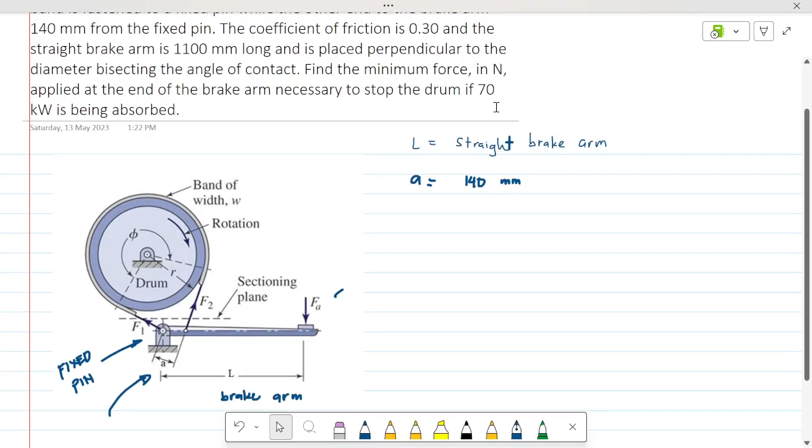Ano yung tinatanong niya? Find the minimum force N applied at the end of the brake arm necessary to stop the drum if 70 kilowatts is being absorbed. Okay. Hanapin muna natin from the 70 kilowatts yung torque. So, power dito is Tn over factor. Pwede rin, this is equal to yung F net times velocity. May velocity ka ba dito? Actually, nagbigay siya ng RPM dyan, pwede mo makuha yung velocity.

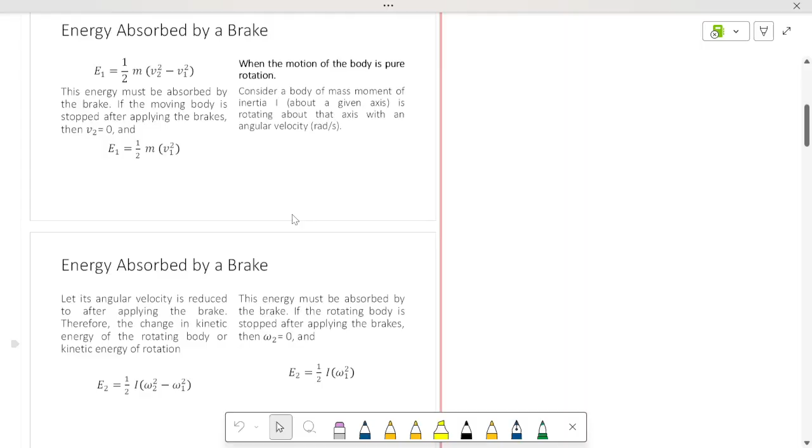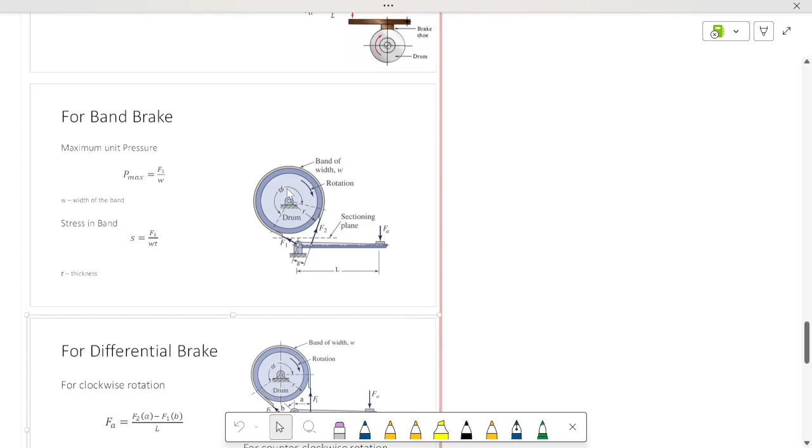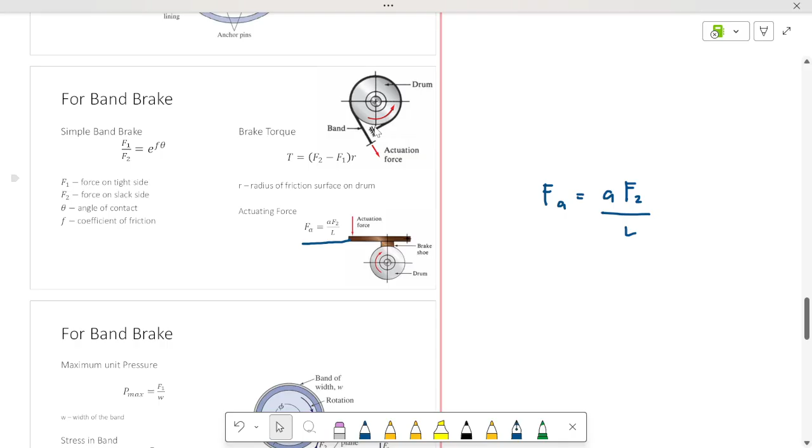Ayan. This one. The actuating force is F A equal to A, yung F2 over the length. Yung F2 is the slack side. And otherwise, kapag there are problems you cannot solve, yung actuation force, pwede mong gamitin yung tight side. Depende dun sa problem. Pero ang tama talaga dyan is the force on the slack side. The force on the tight side is always greater than that of the force on the slack side.

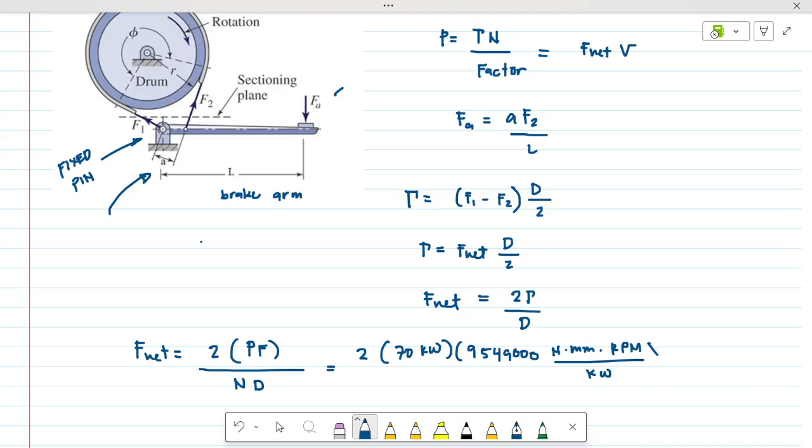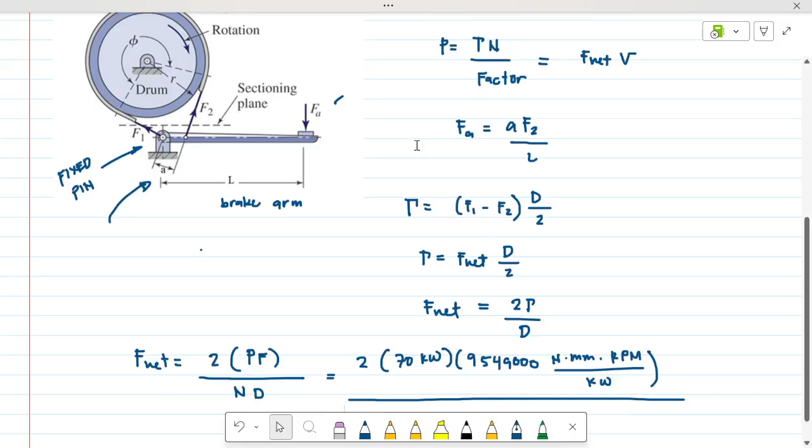May binigay bang torque dyan? Actually, wala, pero meron tayong power. So, punta natin yung power dito. Our power is power factor times Tn. So, power times factor divide by N. D. Yan yung F net natin. So, twice nung power, what is power? 70 kilowatts. Times yung 9,549,000 Newton-millimeter RPM per kilowatt. Check natin if we have recorded this. Okay, we have recorded this. Divided by N. Yung given N natin is 260 RPM.

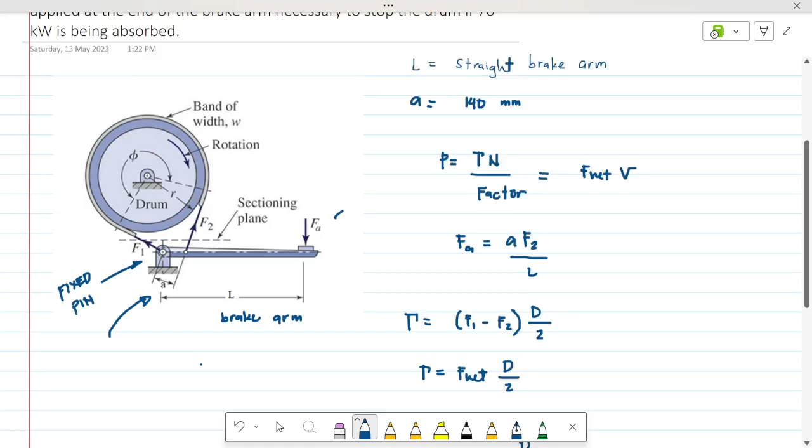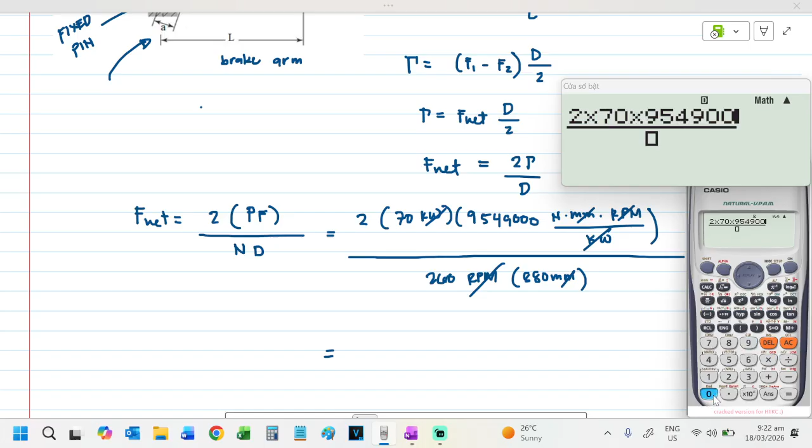The diameter of the drum, if I'm not mistaken, is 880 mm. So, cancelling all same units, RPM, kilowatt, millimeter, ang lalabas ay Newton. So, on our calculator, pakipindot natin para makita natin. So, that is 2 times 70 times 9,549,000 divided by 260 times 880. So, our torque here is 5842.

Okay, 5842.9196. This is in newtons. Torque pa lang yan. So, yung torque na yan, pwede nating makuha dyan yung F net. Ay, F net na pala. F net na to. So, our F net is equal to F1 minus F2. Ayun yung value niyan. Pero sa F1 and F2, pwede na natin gamitin yung ratio nila. Ratio of the forces, that is e raised to mu theta. Okay? So, dito pwede natin ma-equate sila. F1 is equal to F2 e raised to mu theta.

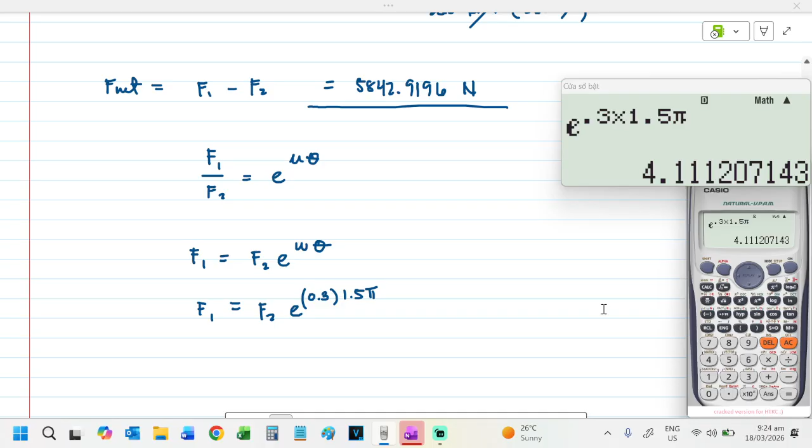So, yung F2 natin, saan ba natin pwede makuha yan? So, F1 na lang muna. F1 tapos F2. Yung e raised to, coefficient of friction is 0.3 tapos 1.5 pi rad. So, that is 0.3 times 1.5 pi. Hindi mo na kailangan i-convert ito sa degrees. So, tab natin. Hanapin ko yung e. Shift e. Oh, sorry. Raised to 0.3 times 1.5 pi. So, the answer is 4.1112. So, 4.1112 F2. Pwede natin i-equate yan para magkaroon ka ng another equation.

So, from F1 minus F2 is equal to 5842.9196. Yung F1 natin is equal to this. So, pwede nating ipalit yung F1. That is 4.1112 minus 1, factor out mo yung F2. This is equal to 5842.9196. So, dividing both sides by 4.1112 minus 1, the answer will be F2. So, tab natin siya. 5842.9196 divided by 3.1112. Ba't naging ganun? Minus 1 na agad eh. So, that is 1878.0276.

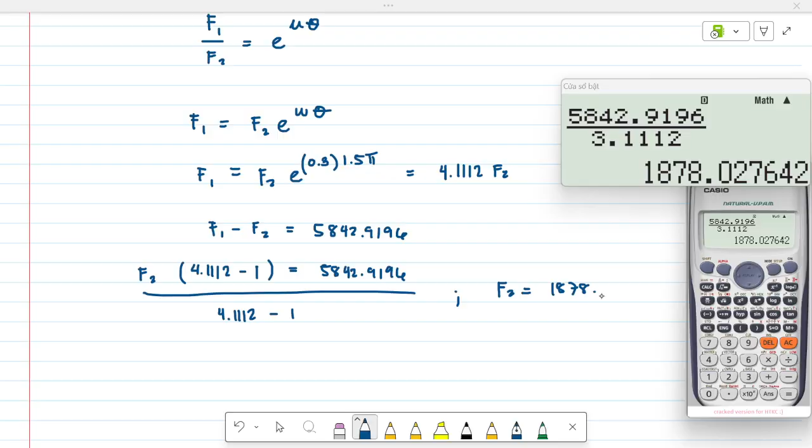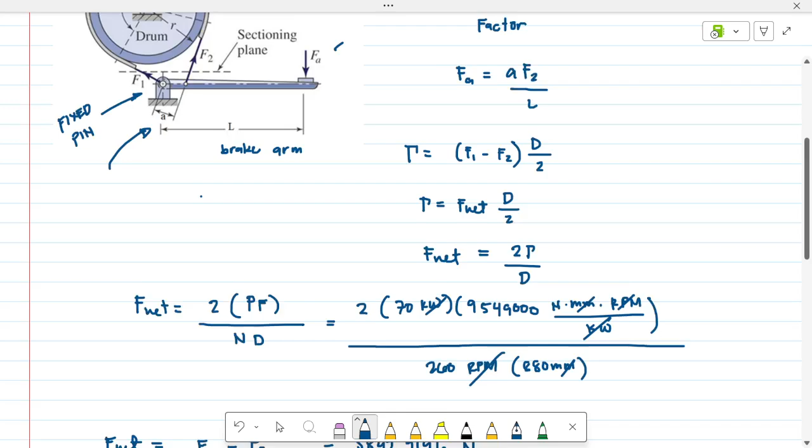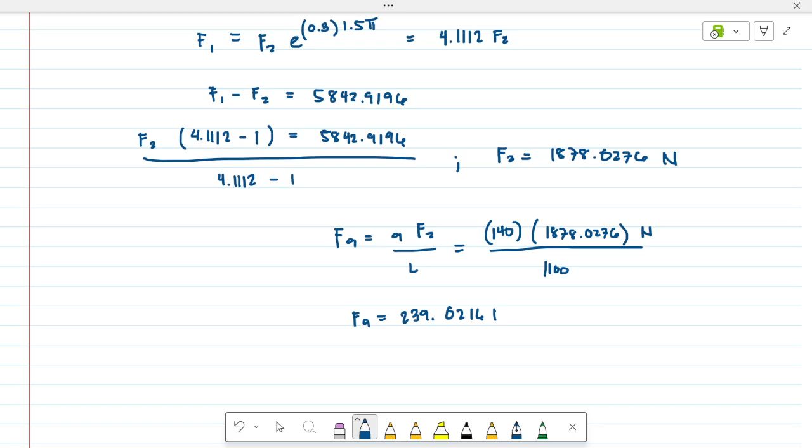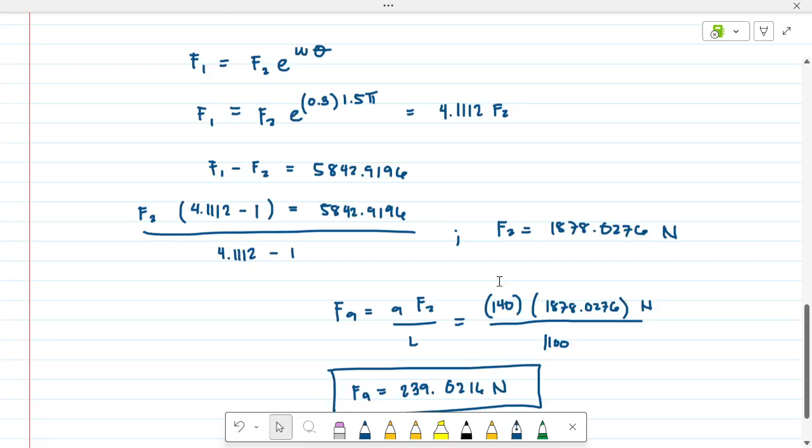That is newtons. Now, ang hinahanap dito is the actuating force. So, actuating force FA is equal to a F2 over L. Yung a natin dito, ang binigay niya is 140 tapos 1,100 yung length. So, 140, tanggalin mo na units kasi ma-cancel naman. 1878.0276 newtons, divide by 1,100 times 140. So, our answer is FA equal to 239.6216 newtons. Pero dun sa book, I think ang sagot dito ay 273.1. I don't know what happened there, pero ginawa naman natin yung tama. So, there is nothing wrong here.

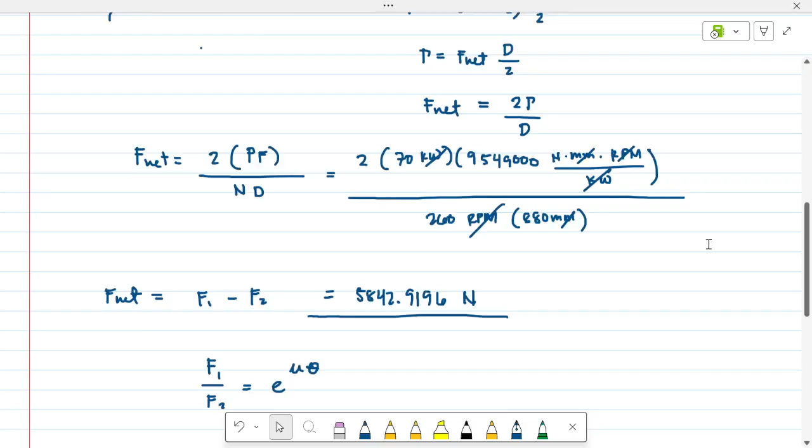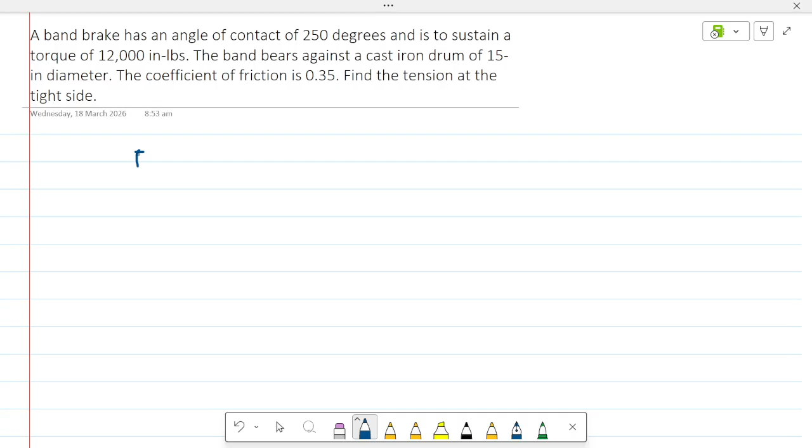Okay? So, next problem. Teka, parang may nagbigay dito ng RPM. Solve natin siya other way around later. So, a band brake has an angle of contact of 250 degrees and is to sustain a torque of 12,000 inch-pounds. The band bears against a cast iron drum of 15-inch diameter. The coefficient of friction is 0.35. Now, find the tension at the tight side. Saan ba makikita yung tension? Dito lang yan, sa F1 over F2 equal to e raised to f theta. Meron ba tayong F1? There is none. F2, there is none. But we are given the torque.

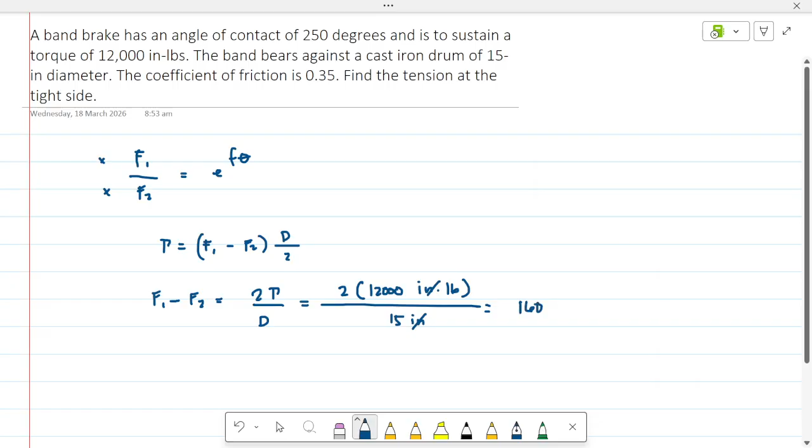So, for the torque, di ba ang torque natin is F1 minus F2 multiplied by diameter over 2. So, yung F1 minus F2 natin is equal to twice the torque divided by diameter. Twice ng 12,000 inch-pound divided by the diameter, 15 inch. Cancel all the same units, pound ang lalabas dyan. So, at your calculator, 24,000 divided by 15. The answer is 1,600 pounds. Now, that is just the F-net. F1 minus F2 is equal to 1,600.

Dito pwede natin kunin yung F1: F2 times e, tapos yung theta natin is 250 degrees, coefficient of friction is 0.35. So this is 0.35 multiplied to 250 pi over 180. So F1 is equal to F2 times, calculator natin, shift e, 0.35, 250 pi divided by 180. So, 4 decimal places, 4.6051. Yun yung value dito. Palitan natin on this equation. This is A, this is B. Ipasok natin yung B sa A.

So, this is 4.6051 F2 minus F2 equal to 1,600. Now, dividing both sides by 4.6051 minus 1. Ang hinahanap pala ay F1, the tight side. So, this is 1,600 divided by 3.6051. Mapapansin nyo, lagi kong mini-mental math, mina-minus ko agad yung 1. Kasi ganun naman yung process, lagi minus 1. Para lesser yung gagawin mo sa calculator.

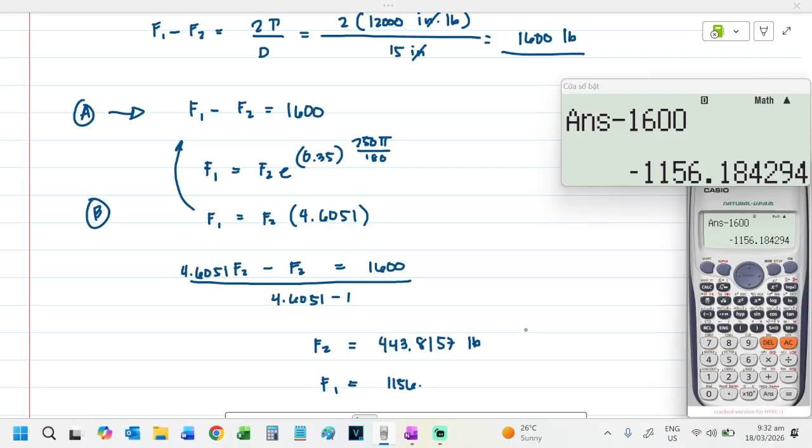Okay, so that is 1156.1843. I don't know ba't ang lalayo na nagiging sagot niya sa book. O, tignan natin, reference natin yung book later.

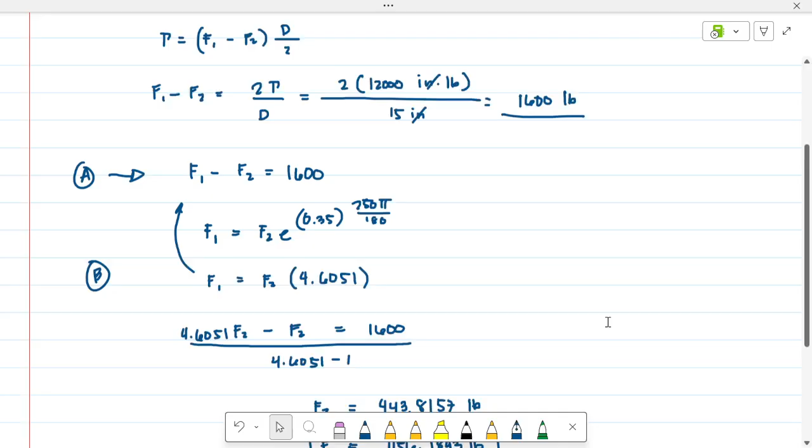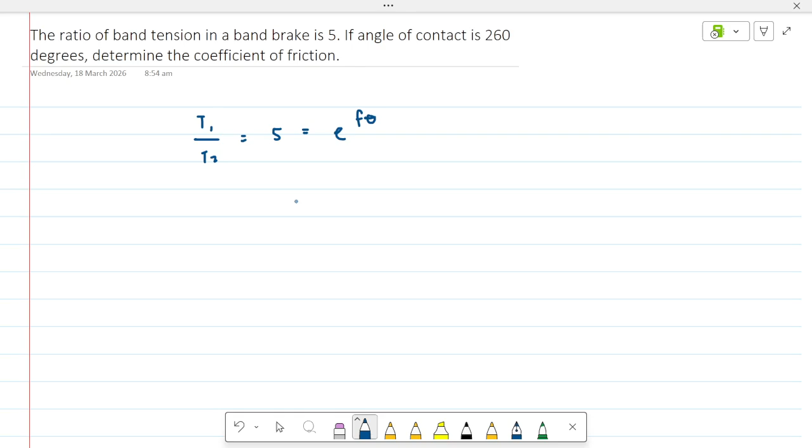And next problem, the ratio of band tension in a band brake is 5. So, T1 over T2 is equal to 5. And this is equal to e^(f theta). Now, if angle of contact is 260 degrees, determine the coefficient of friction. Okay tayo dyan. Sir, shift solve. Sa board exam. Pero dito, hindi pwede.

So, this is 5 equal to e. Yung coefficient of friction is as is. Tapos, 260 pi over 180. Yan. So, ibaba natin to. Simplify ko muna yung 260 pi over 180. Or pwede na rin, ganito gawin nyo. I-ln natin lahat to. ln, natural logarithm of 5 equal to, ibaba ko ito. Bababa siya. So, 260 pi over 180, f. Okay? ln ng e. Binaba ko lahat.

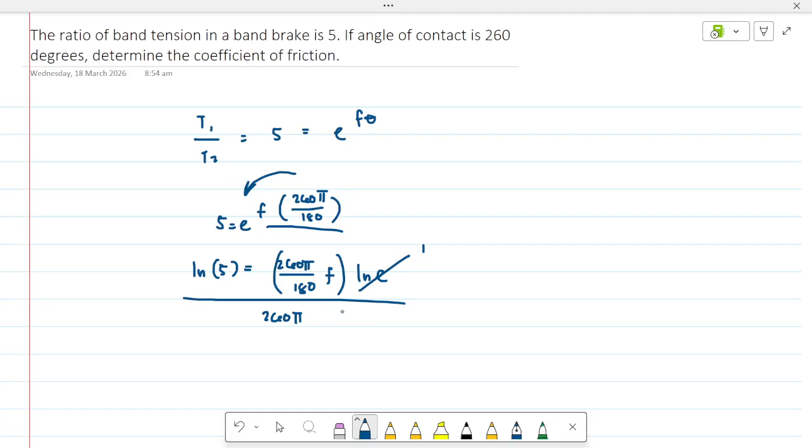Itong expression na to, pwede mo ibaba yan. Bring down pag nag-natural logarithm ka. Any power of your natural logarithm could be a multiplying variable pag ibinaba mo siya. So what will happen there, divide ko na lang both sides by 260 pi, kasi cancel na itong ln of e. That is equal to 1. Try nyo sa calculator nyo, ln of e. So, 260 pi over 180. So, cancel ito.

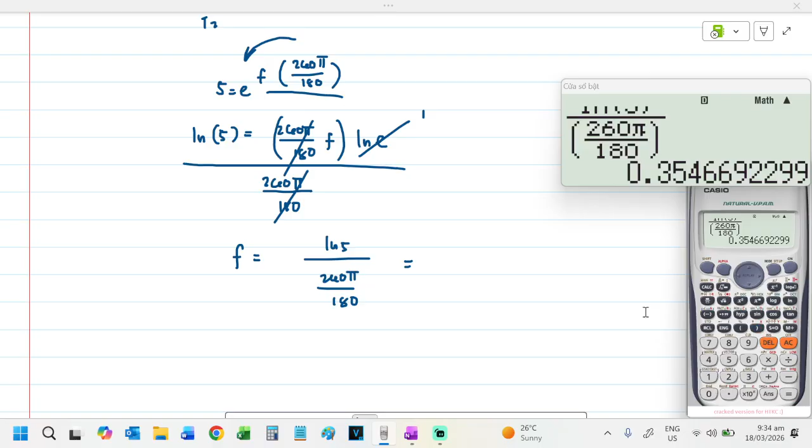So, f will be equal to ln of 5 over 260 pi over 180. So, the value of your coefficient of friction is, hindi siya naman mahirap, basic lang. ln 5 over 260 shift pi over 180. So the value for your coefficient of friction is 0.3547. Okay, basic lang yung next problem.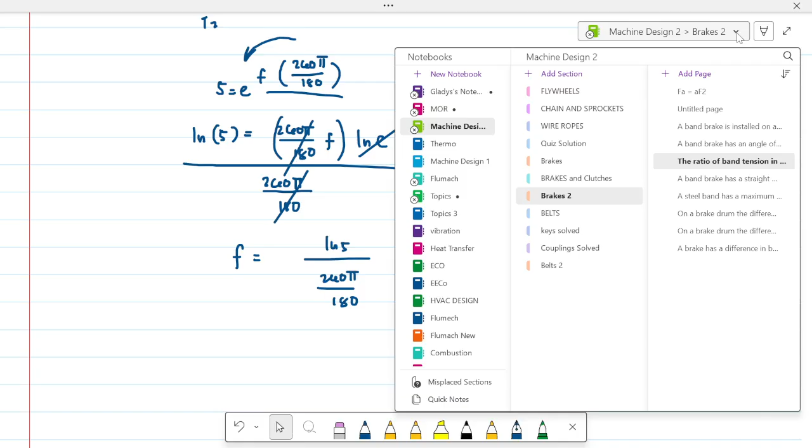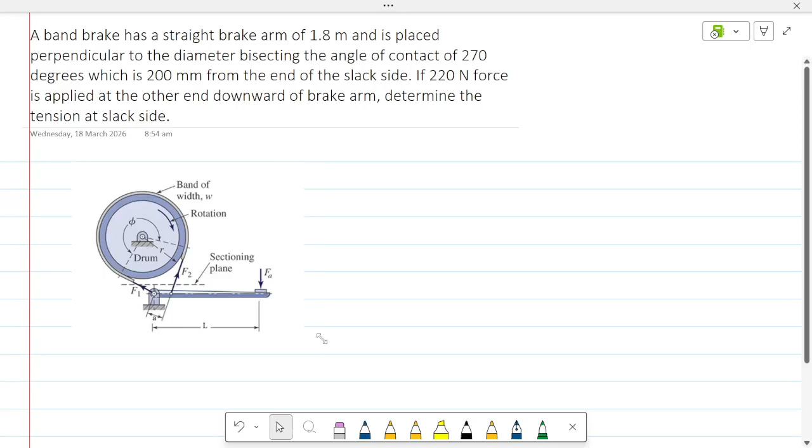Next is, a band brake has a straight brake arm. So diretso na naman siya. Okay? Of 1.8 meters. So, paste ulit natin siya. Straight brake arm siya, and is placed perpendicular to the diameter, bisecting the angle of contact. Sabi dyan, the straight brake arm. Right? So, perpendicular to the diameter, bisecting the angle of contact.

So, ano yung bisects? Ibig sabihin, itong dalawang to ay magkalinya sila. Ito, imumove natin ng konti, magkalinya daw sila. The angle bisector. Yung angle mo nandito. Binisect niya yung dalawa. So, equal part ito. Okay? Ganun yung pag-drawing sa kanya.

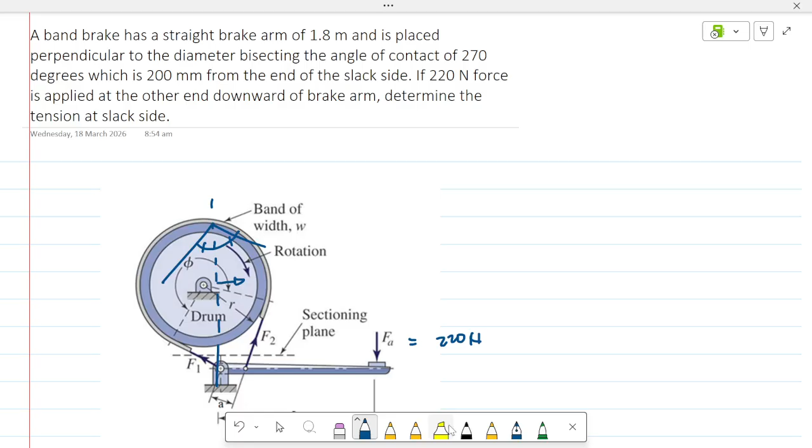Now, angle of contact is 270 degrees, which is 200 mm from the end of the slack side. Now, if 220 newton force is applied to the other end, downward of the brake arm, so the applied force is 220 newtons. Determine the tension on the slack side. So, diretso tayo ng FA is equal to A F2 over L. Sir, magmo-moment pa ba ako? Hindi na kailangan. Kasi binigay ko na yung formula sa inyo.

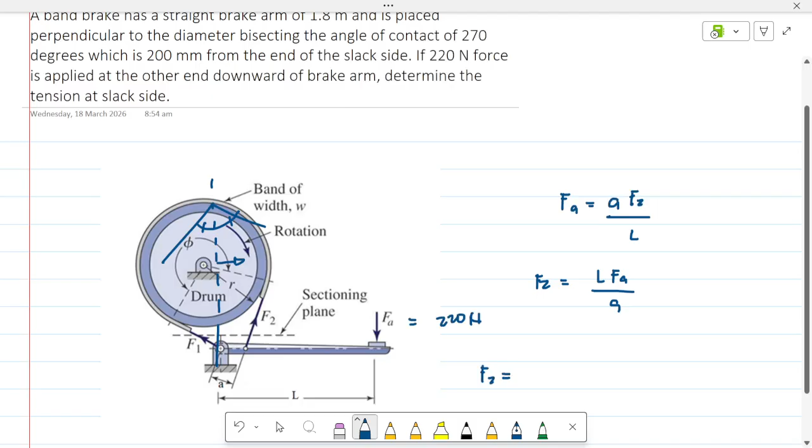Okay? So, gagawin mo na lang dito, F2 is equal to L FA over A. So, F2 is equal to, ano yung L natin? Binigay dyan na 1.8 meters. Gawin natin 1,800 mm. Tapos yung FA natin is 220 newtons. Yung layo niya is A. Ano yung A dyan? Nagbigay ba? Ito, 200 mm. Ano ba sagot dito? 200 mm. So, let us try what will happen here.

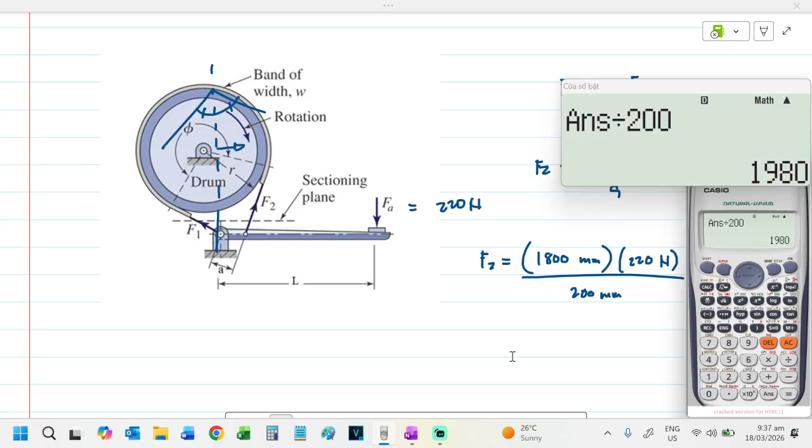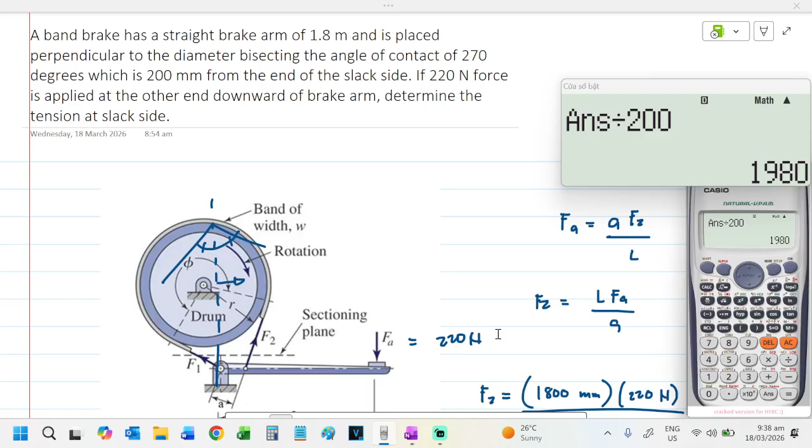So, this is 1,800 times 220 divided by 200. So, the answer is 1,980. Sir, ba't naging ganun? 1,980 siya. That is 2 kilonewtons, yung sagot dyan. 1,980. So, 1.98 kilonewtons F2. Hindi na kailangan mag-moment. Yung iba nagmo-moment pa. Hirapan lang kayo dyan pag nag-moment.

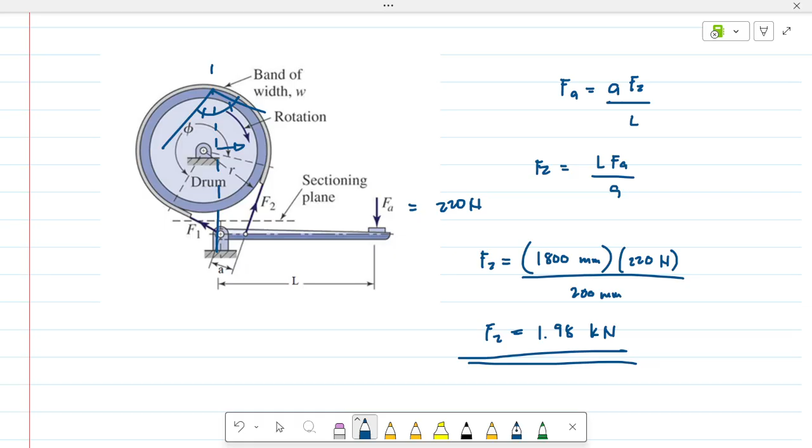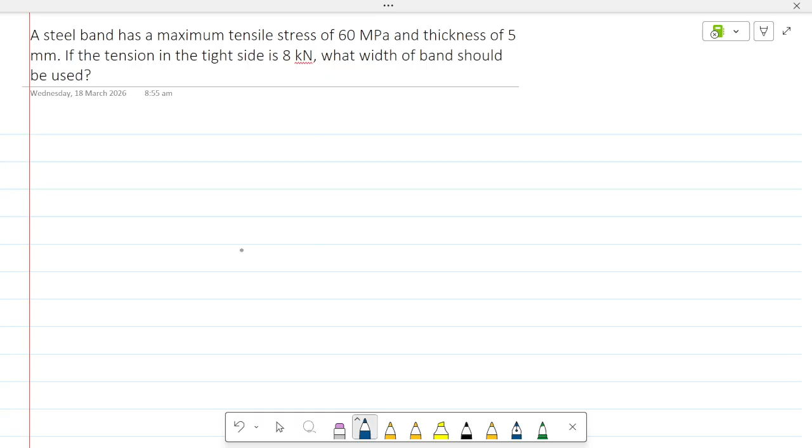So, this is for that problem. Next one. A steel band has a maximum tensile stress of 60 MPa and thickness of 5 mm. If the tension on the tight side is 8 kilonewtons, find the width of the band that should be used. So, paano yung solving natin dito? Yung stress on the band, okay?

The stress on the band is equal to force over area. Drawing natin yung band mo. Ito yung band. Belt yan eh. So, nandito yung force. Ano yung area? Ito. This is the thickness. This is the width. So, the stress now is equal to force over area. So, ibig sabihin yan, yung pulling force or tension, divide by yung area.

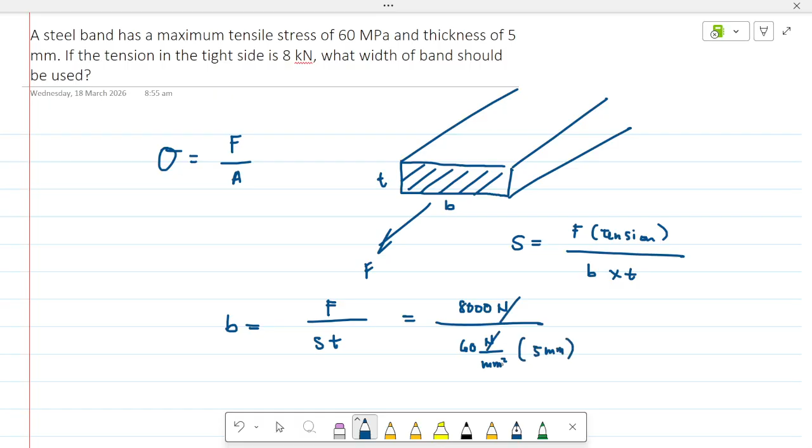So, meron ka bang force na binigay dyan? Tight side, yes. What width should the band be used? O, direction na agad ng solving. So, B is equal to F over ST. So, this is 8,000 newtons kasi kilonewton. Tapos 60 newton per millimeter squared multiplied to 5 mm. Cancel all same units. Mm squared may matitirang isa. So, aakyat yan sa taas.

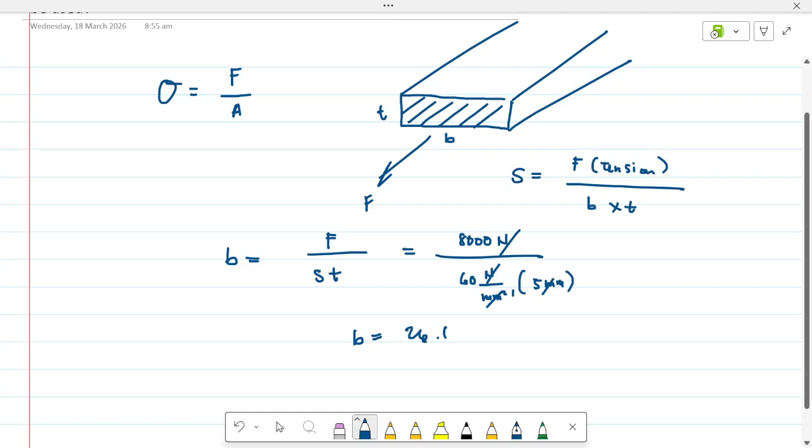So, calculating the value, 8,000 over 60 times 5. So, that is 26.67 mm. 26.67 mm. Board exam question yun. Ganun lang kadali.

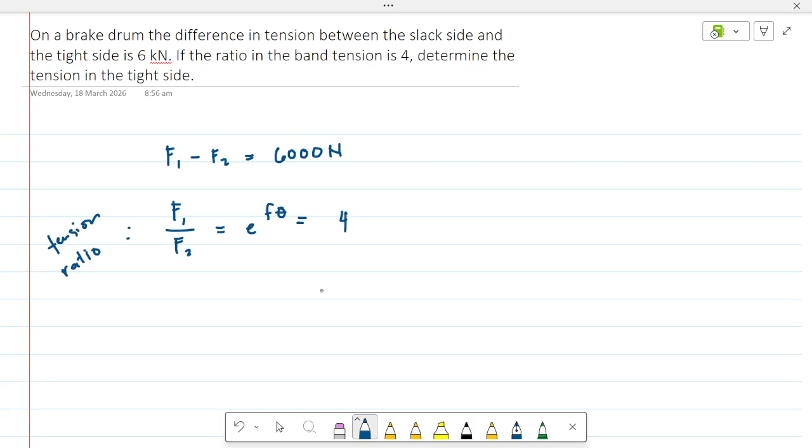So, next problem. On the brake drum, the difference in tension between slack side and tight side is 6 kilonewtons. So, F1 minus F2 is equal to 6,000 newtons. Now, the band tension ratio, e to the f theta, is equal to 4. Now, determine the tension on the tight side. Basic. So, meron ka equation nito.

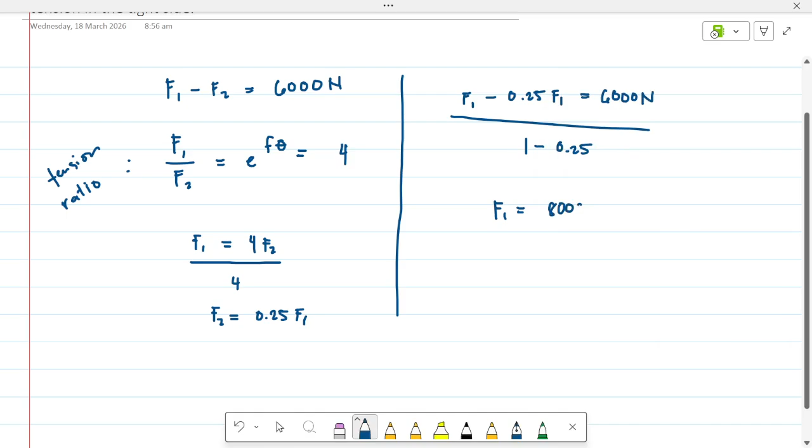So, F1 equal to F2 times 4. So, 4 F2. Determine the tension on the tight side. In terms of F1 tayo. So, pwede mo i-divide ng 4. Therefore, yung F2 mo ay 0.25 ni F1. Solving, F1 minus 0.25 F1 equal to 6,000 newtons. So, 1 minus 0.25, F1 is 6,000 divided by 0.75. That is 8,000 newtons. Okay, that is F1. Basic.

Next problem. Last two. On brake drum, the difference in tension. Ay, inulit na lang. Last one na lang pala tayo. Naulit na siya.

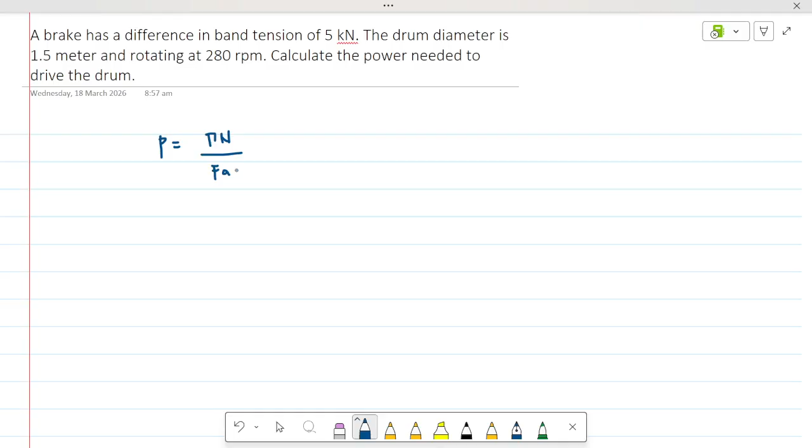A brake has a difference in band tension of 5 kilonewtons. The drum diameter is 1.5 meters and rotating at 280 RPM. Calculate the power needed to drive the drum. Pwede namang daanin mo dito: power is equal to Tn over factor. Pwede rin daanin mo sa Fnet times velocity. Velocity is equal to what? Ang velocity is equal to pi diameter times n. Itong dalawa, circumference.

Hindi na maalala kung paano sinusolve yun. Diba?

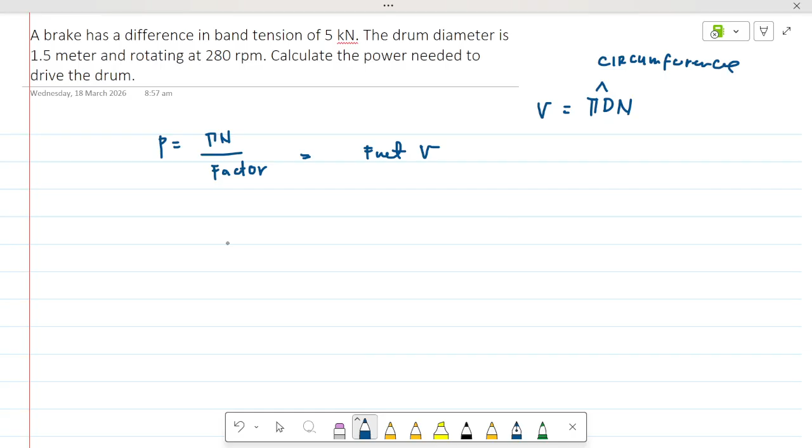Anyway. So, meron na tayong Fnet. So, power is equal to Fnet, 5,000 newtons, times pi, diameter 1.5 meters, so 1,500 millimeters. Tapos yung N natin ay 280 RPM. Kaya anong gagawin natin? Newton millimeter, dapat Newton meter. Newton meter is torque. Divided by seconds, joule per second, kilowatt yun. So, this is 9,549. Pero hindi dapat.

Tingnan natin yung unit, Newton millimeter. I-divide ko na lang ng 1,000 millimeters every meter. Tapos yung RPM natin, rev per minute. Times 1 minute every 60 seconds. Cancel. Ang natitira, Newton meter every second. Ang kailangan ko ay kilowatt. So, times 1 kilowatt per 1,000 Newton meter per second. Makancel si Newton, meter, seconds. Ang lalabas ay kilowatt.

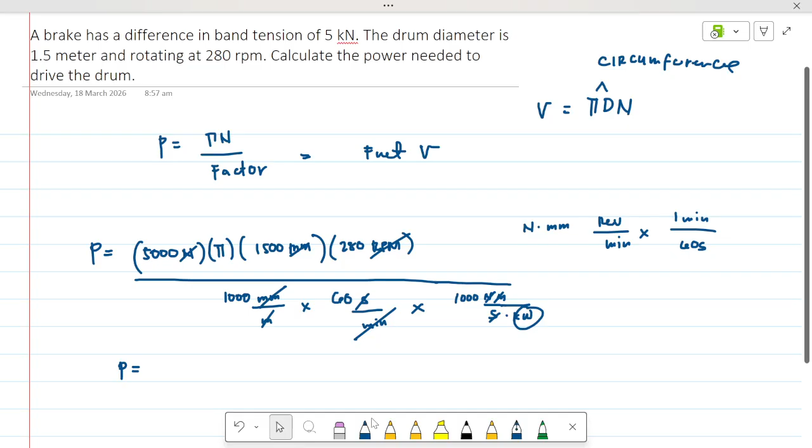So, mali pala na i-divide ko siya direkta ng 9,549. Kasi na-derive yun sa 2 pi Tn, hindi sa velocity. Huwag gagawin yun, ito yung tama. Calculator: 5,000 pi times 1,500. Common mistake dito, dinivide ng 9,549. Hindi naman natin dinaan sa Tn over factor, dinaan natin sa Fnet times velocity. Times 280, tapos 1,000 times 60.

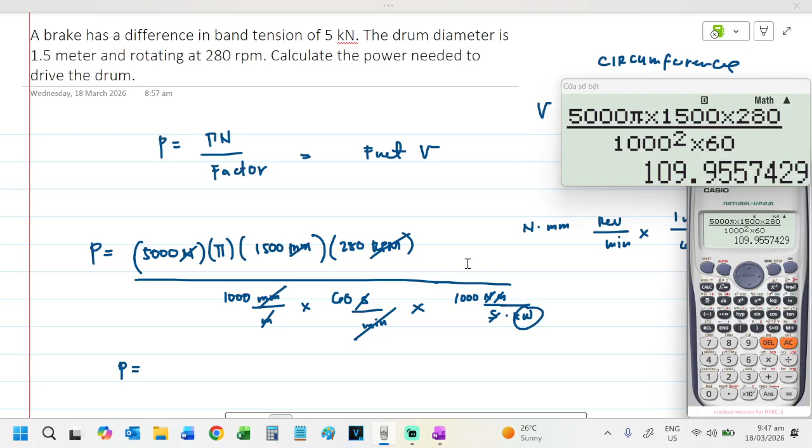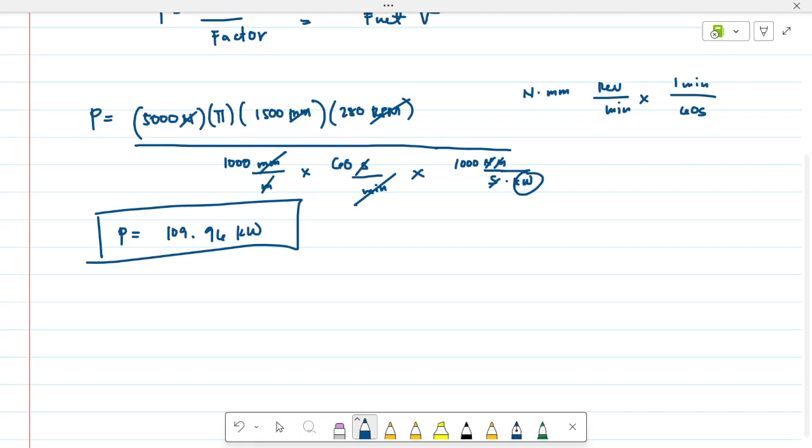So the answer is 35 pi or 109.96 kilowatts. 96 kilowatts. I think that suffices our calculation there. So that is the last question.